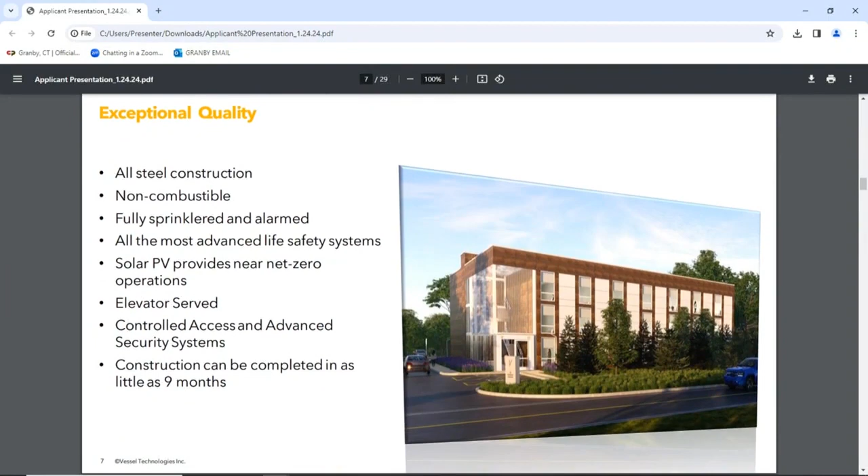We have a huge goal of creating very sustainable products. Everything we do is about energy efficiency and sustainability. So we have active systems that provide water leak detection to prevent leaks in buildings. We have solar photovoltaic, as I said, on the roofs. We use low-flow fixtures. We have active energy consumption features so that people can save money in terms of the operation of their buildings. And many other things that lead to the most energy efficient and sustainable building possible.

And then everything is created through our smart home technology that provides a number of different things in terms of quality of life as well as accessibility features and performance features that allow people to have a number of different things that are typical in a unit.

So a little bit about the site today. You can see the site here. The site was previously approved in 2007 for the development of about a 45-foot tall office building. That office building never came to fruition. You have currently an unfinished foundation on site with all sorts of other problems associated with it. No current stormwater management, obviously, no landscaping or anything else like that.

This is a picture of the existing conditions. I'm going to take a brief pause here and bring up one of the leadership so that we can talk about the existing conditions as well as these plans.

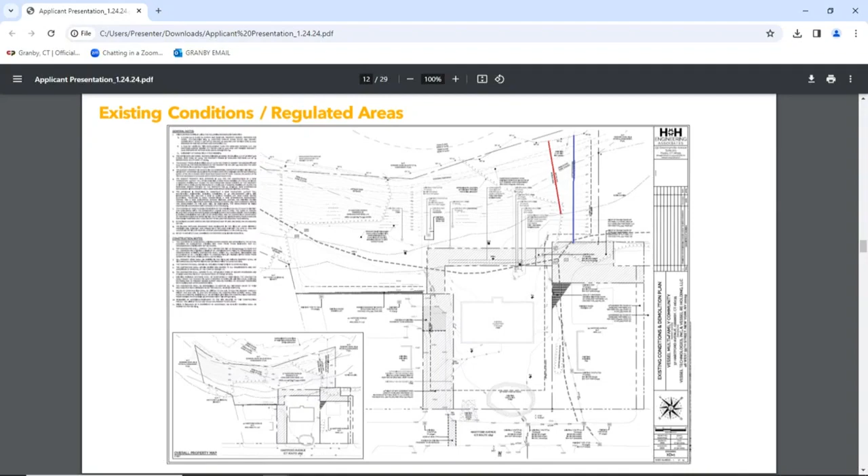So we'll go over a couple of these things. Good evening, everyone. My name is Seamus Moran, a professional engineer in Connecticut. And I'm screwing this up. We're out of it again. Is there a button up there we have to press to get it back into presentation? Can I handle all the tech for me? Sorry, one day. Let me start over again.

My name is Seamus Moran, PE in Connecticut, representing the applicant. I work for H&H Engineering Associates, and I'm the civil engineer for the project. Familiar with the site, I'm sure. It's a new application though, so you're going to hear the same stuff again, unfortunately, for the record.

So what you're looking at here is an existing conditions plan. This is what we have out there, and I'll take a step back in a moment. But this is, if you go to the site right now, this is what you see. There's a partially constructed foundation and some stormwater management improvements. You can see from the surface, catch basins, manholes, and a steep slope in the back of the property that was rough graded a few years ago.

The total property is about 2.55 acres. On the property, we have about 1.24 acres of land within the 100-foot upland review area, and an additional 0.41 acres between that 100-foot inland wetland setback and the 200-foot watercourse setback. While I'm mentioning numbers, what you'll see when I get to it is we're proposing 0.34 acres of improvement within the 100-foot review area, and an additional 0.29 acres of improvement between the 200-foot and the 100-foot.

So if you can skip ahead, this is an overview of the proposed site plan.

Generally, the building that you were proposing will be in a very similar location as the foundation that's out there now. If you go out there now, you'll see where the new building will be is in a very similar footprint to the existing foundation. In the parking, we are trying to reutilize a previous approval for parking spaces to the back of the building, which is essentially where we're laying our parking out, right behind our building.

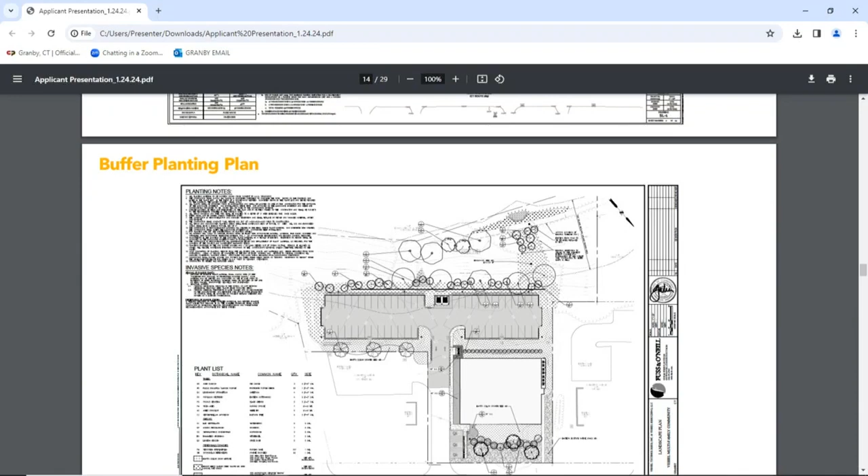Next slide, please. Greg will get into the planting plan, but as you can see, we're buffering our improvements with some landscaping. There's a much nicer color rendering that Greg will get into later, or maybe after I present. We'll come back to it, just so we don't jump around.

So as I mentioned, what you see on the first slide is two steps back. Prior to 2007, it was a single-family residence with a paved driveway. Then in 2007, it was approved locally for an office building, a 45-foot tall office building with 53 paved parking spaces, which again, this is as you see it now, partially constructed. The foundation is out there.

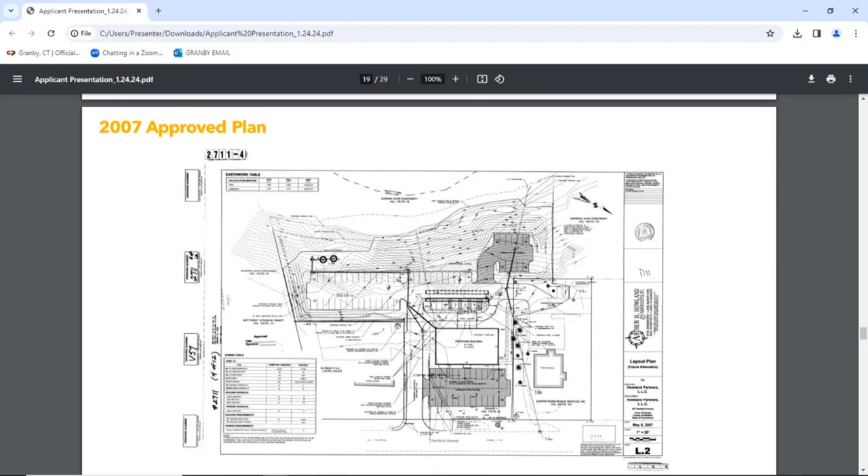Next slide, please. This, as I alluded to, is the existing conditions plan, that's the existing foundation. There's no building there, it's just the foundation, but they installed some improvements. They installed some of the stormwater management system, I think all of it in fact. They installed the septic system, utilities, and they rough graded the back of the site where the parking would be.

They never put any pavement in there. It was just simply a base coat and rough graded. But that area that you see where the parking will be is already rough graded. It's already flat for our parking area.

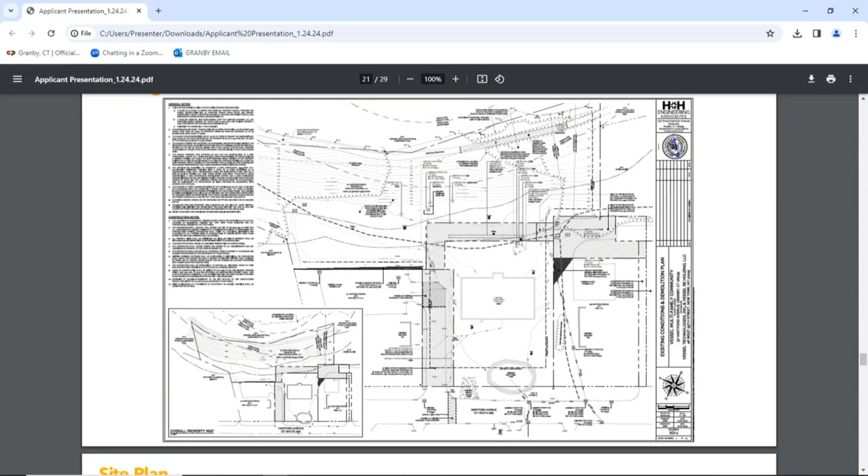Next slide, please. What you see here is our proposed layout that I just mentioned, 56 parking spaces. By Public Act 21-29, 44 are required. By Town of Granby regulations, 64 are required, and we are at 56 parking spaces.

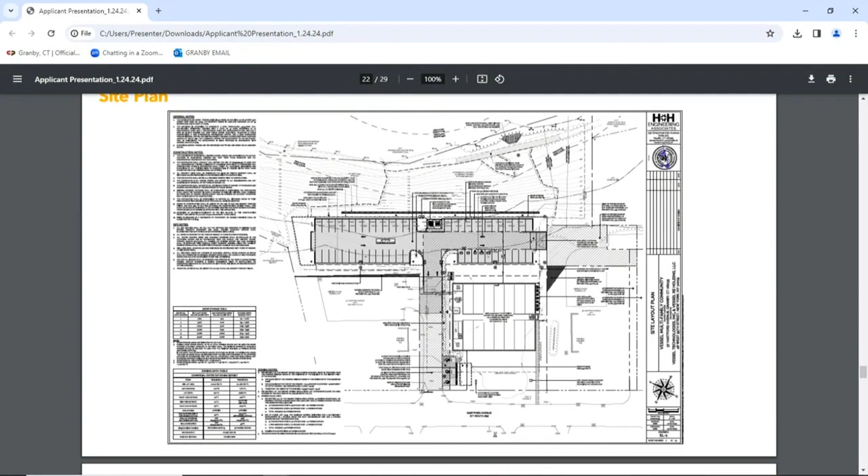Also, if you go to the next slide, what we're proposing is a 3-story building, 42 units. So a slight variation from previously, however, it's a new application. So what we're looking at is 3 stories, 42 units. 40 of those are 1-bedrooms, and 2 of those are 2-bedroom units.

There's a dumpster on the site. There's walkways internal to the site to get to the front door. Some storage areas, and 3 accessible parking spaces in the front, closest to the front door.

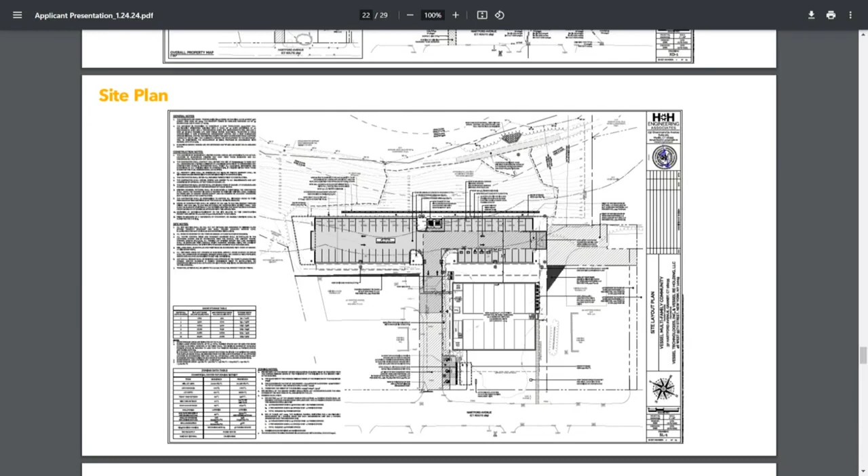It also infiltrates for the 25-year storm event entirely, so we won't have any discharge up through the 25-year storm event. Any discharge for the 50 and the 100-year is actually conservative because our infiltration rates on the site were well over 100 inches per hour, and we used a design rate of 20 inches per hour. So our discharge at the 50 and the 100-year are relatively minor as it stands, 1.61 CFS and 2.74 CFS from our stormwater management system, and that is conservative in those values.

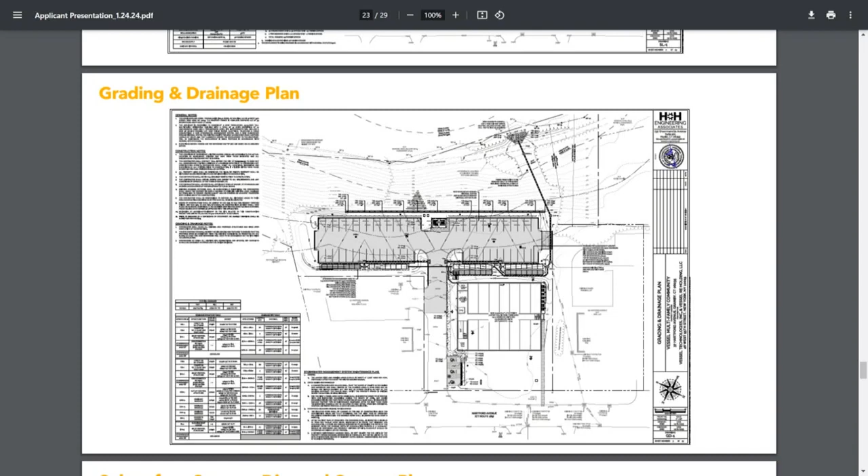Next slide, please. What you see here is the stormwater management system. We have one long linear row along the back side of the parking lot.

The public health code and the DEP code are somewhat at odds in how stormwater and septic effluent are managed together, so we found a happy medium. We heard the concerns of the commission last time. We are using a DEP practice of using stormwater runoff to dilute septic effluent, which the health code would much rather you keep completely separate. But we are meeting the separating distances required by the health code to allow infiltration of stormwater above the septic system.

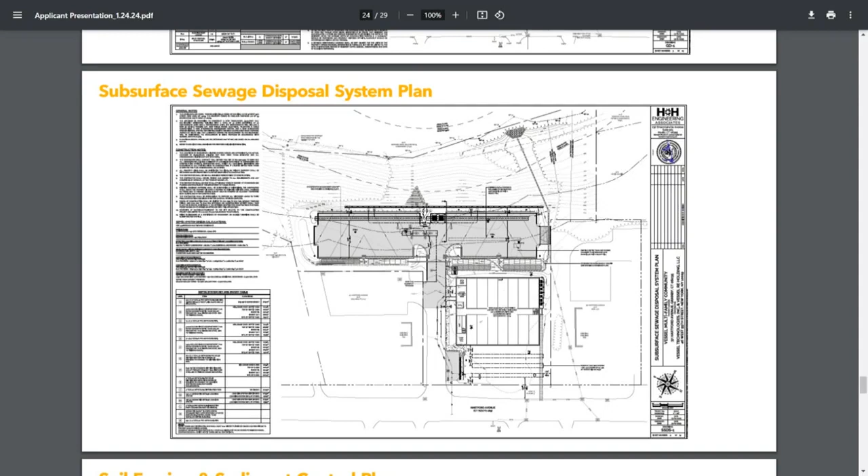The reason being, as everybody remembers, the nitrogen dilution analysis was a sticking point last time we were here. It's a DEP item, not anything we are required to manage. However, we heard the concerns and redesigned everything, the stormwater system and septic system, and now our nitrogen concentrations at the wetland limit are below the public water drinking threshold.

That slope, which Greg will get into in a moment, we are looking to revegetate. There is some vegetation out there now. It is steep, but one of the concerns last time was that we weren't landscaping the slope, so Greg will get into the landscaping we're proposing on the slope. And with that, I will pass it off to Greg.

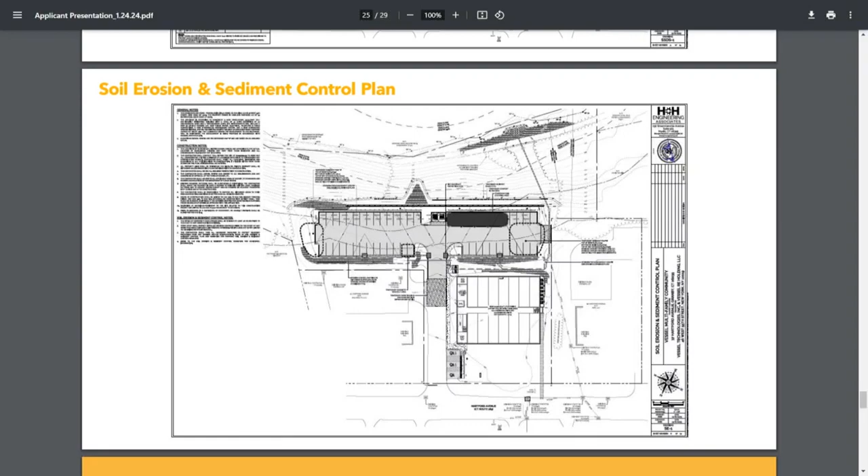Next slide, please. Thank you. Hi, my name is Greg Wilson, landscape architect with Fuss & O'Neill in Manchester, Connecticut.

The proposed plantings in the regulated area were largely arrived at in coordination with the previous wetland agent, Kate, through her review and in response to some comments. What we arrived at was a planting buffer at the top of the slope between the parking lot and where the top of the slope begins, and then additional plantings at the bottom of the slope adjacent to the wetland area.

The purpose of those plantings was to provide canopy adjacent to the wetland area, which would reduce solar exposure and prevent reestablishment of invasive growth on the existing hillside. The buffer at the top was highly visual in nature, and also a physical barrier to prevent anything from blowing from the parking lot down that slope into the wetland area.

The proposed plants selected are all native, flowering and/or fruiting, and of high value for wildlife species. They're also listed in the native plant list that's part of the Connecticut Stormwater Manual. Specifically the tree species, we wanted to make sure they were fast growing so they could get up to height and provide a big canopy, with the benefit of a more expansive root system to help stabilize the regraded areas at the top and bottom of the slope.

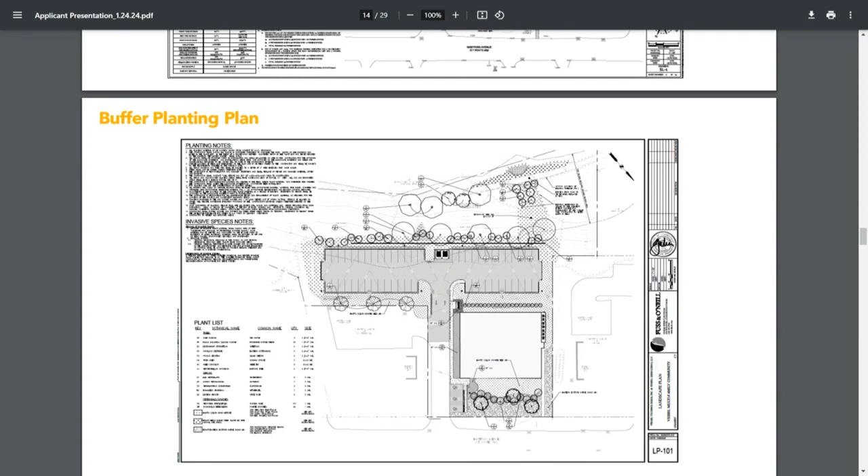Actually, Josh, you want to go to the coloring plan? It's easier to show. The regrading of the slope is predominantly from behind the parking lot to where our shrub and tree buffer ends, and then down the slope, which is for installation of a new stormwater pipe. That'll be reseeded with a native steep slope mix containing 20% annual ryegrass, which germinates very quickly and stabilizes quickly after seeding. The rest of the mix is flowering perennials and grasses that'll provide a diverse, varying seasonal cover throughout the year.

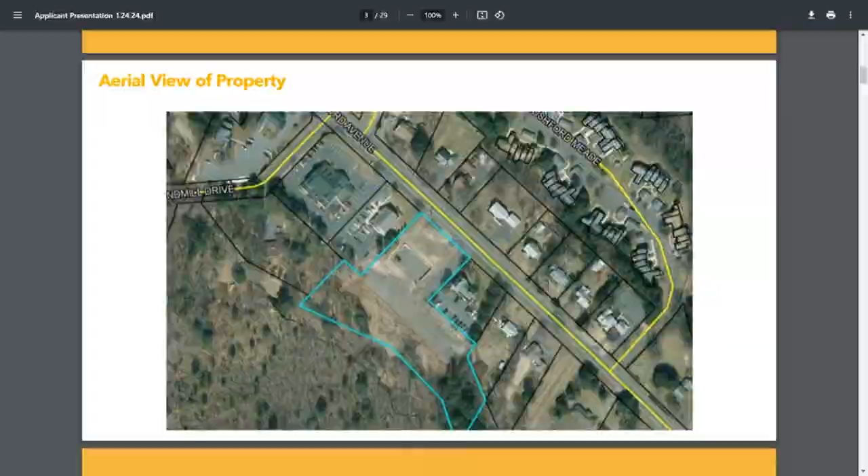This is an organic swamp. It's not his fault, it's just bad mapping, and he didn't go in and do what I did, what we did. So we took samples, we took them up to the UConn Soil Laboratory, which we like to use. They're extremely reasonable and very, very efficient. Most of what they do is for agricultural purposes, but we use them because they give us a whole bunch of information.

Among those things I had them do is look at the chemistry of the soil, which I won't bother you with now, but I will bother you with the last two pages of the report, an attachment. So what I did is I looked and said, okay, I want to get two samples. One I want to be representative of the deeper stuff, which has this muck that goes the depth of my auger plus. And I want to get a sample representative of an intermediate situation, which is probably closer to the wetland boundary, because obviously the more you go into the swamp, the deeper the muck gets, and the further you come out, the less so happens.

So I did two different samples, so we can kind of have one that's a little further away from the wetland boundary and closer to the stream, with organic matter. We basically went down, say, 24 inches or so, collected a sample, put it in a Ziploc bag, and off it went. The organic matter content, this is loss on ignition, so they basically burn it, and then they can figure out by measuring what's lost in ignition - 71.1% organic matter. That's pretty darn high. The second one, the other representative sample, only had 16.3%, still pretty high in organics, and that was a sandy loam.

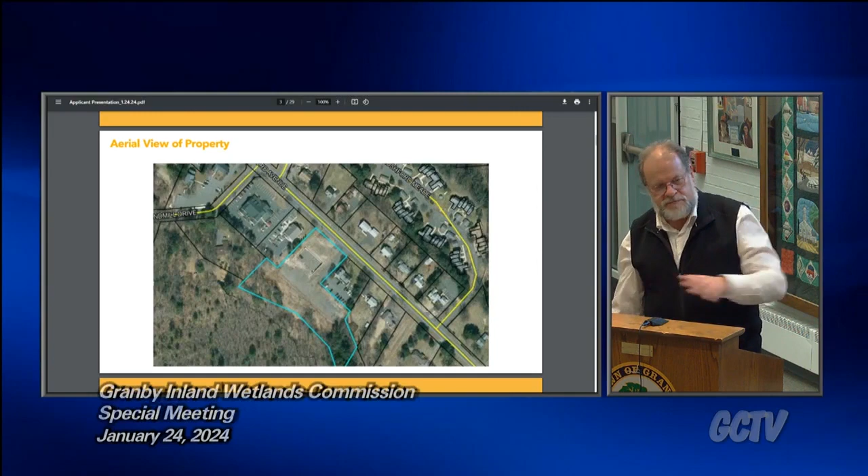And what's underneath this - Saco is a silt loam, which means it has fines in it. But what we found here underneath, at depth, whether it was say 28 inches or 42 plus, in the intermediate, was that we had a loamy sand, or loamy fine sand. So this is very transmissive. And why I'm saying that is because what's going to be coming down from the hill under the septic system is going to hit that layer, and the layer is going to be the groundwater. It's going to basically carry along, express itself down into the swamp, and it's going to be intermingling, if you will, with the organics also.

So, in his most recent report, Dr. Danzer, as you can see, I think he realized that what the applicant had done is heard the concerns from this commission and from the public, and went back and changed a few things. One of the things they did, which we could have gone into a little more detail but I'm sure we will in the future, is that the septic system has been enhanced.

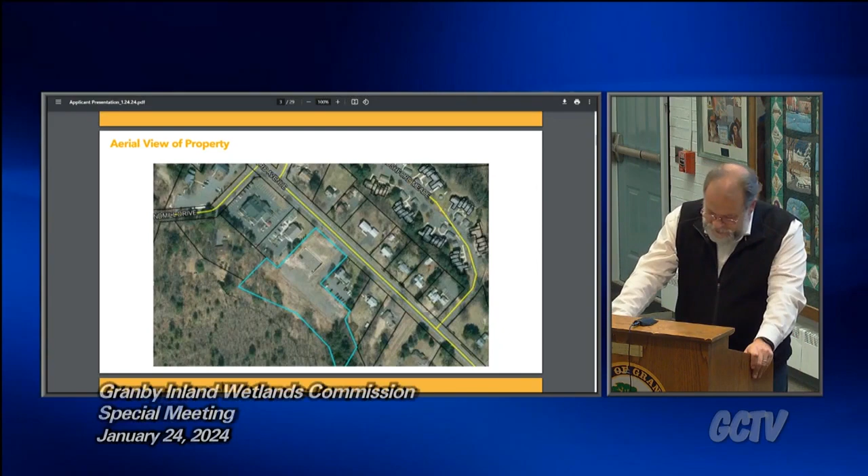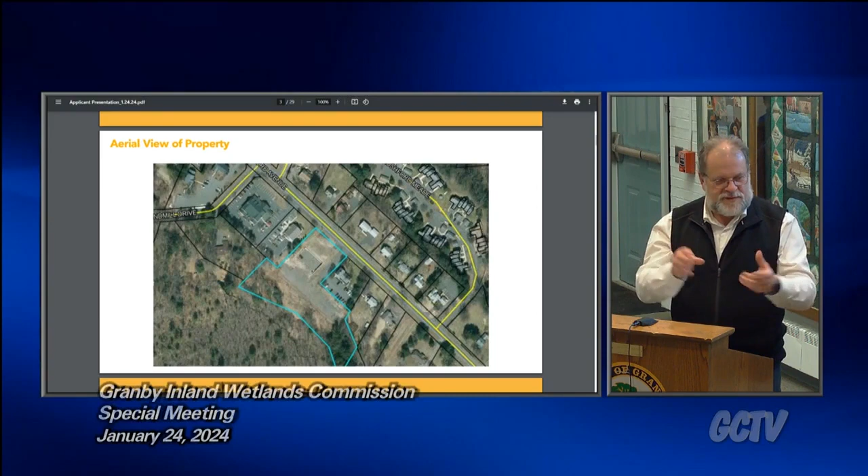They gave additional best management practices, including a system called Soil Air, which I've been familiar with from another project I did down in Guilford. I actually met the inventor, if you will, Mr. Potts. And what we found out is by using the soil air system, which aerates what's coming through, as I mentioned before, your best way of taking care of nitrogen is to have both aerobic and anaerobic conditions. Anaerobic is where there's saturation, not much oxygen, and aerobic is where there is oxygen, because there's two sets of bacteria, and if you get both working, your denitrification or nitrification is at a very high degree.

So we increased our attenuation of nitrogen - well, one of the ways we did it is by the soil air, and that itself gave us an additional 20% reduction of nitrogen. So that was significant.

So you'll see through this report that we have, in the first part - I'm not going to go into it too much at this point, I'm almost done with my remarks for the night - I just want to give you a flavor of what we've done. The first section is direct responses to your town consultant's report, point by point. There were 4 issues that he had, and we explained those.

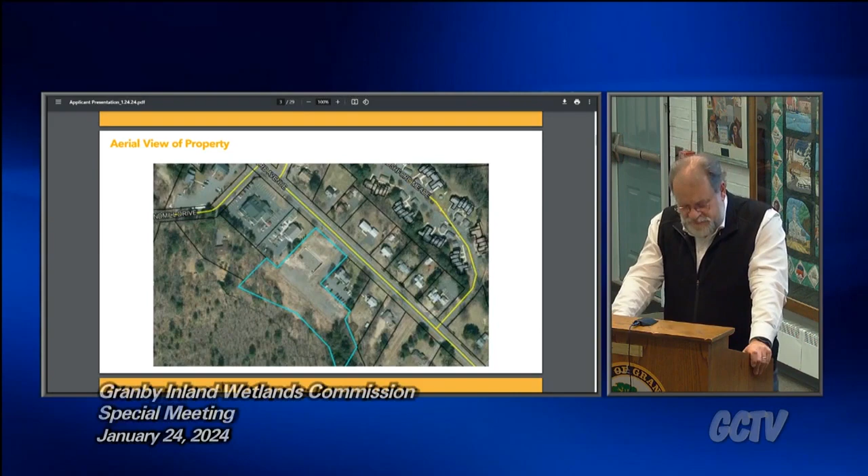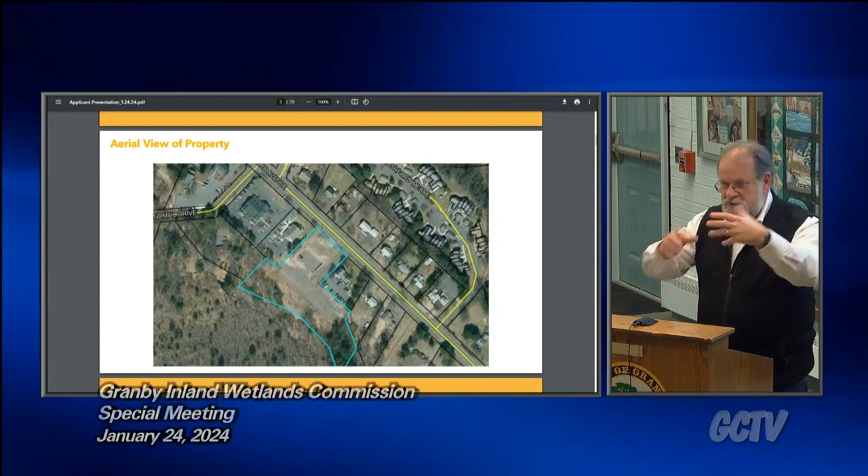The subsequent sections take a deeper dive into the science, more technical in nature. We looked at studies we already knew about from other projects of what swamps and these kinds of conditions do as far as denitrification, nutrient uptake, etcetera, and how these swamps are extremely protective of flowing waters, which is the more sensitive resource here, not the swamp itself.

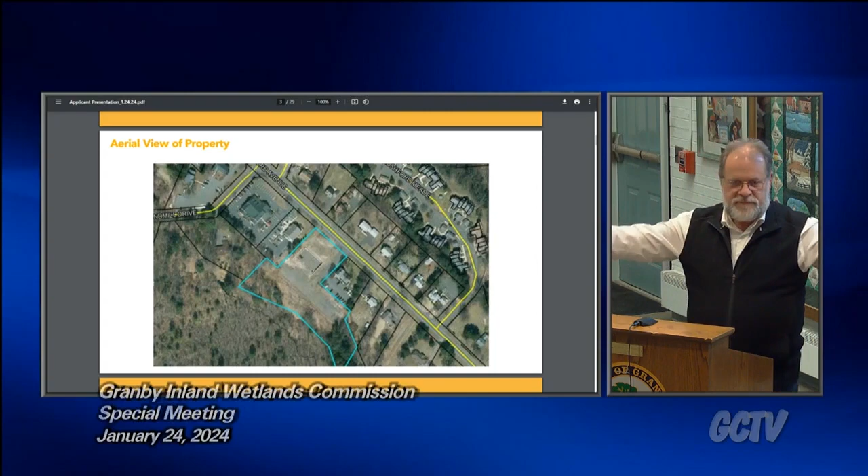Although if it was a swamp that was sensitive, what you'd call an oligotrophic system, one with low nutrient availability, dumping more nutrients even at a low concentration could have an effect on vegetation, fauna and flora. But this is a mesotrophic system, meaning in the middle - not eutrophic, loaded with nutrients, not oligotrophic, which is less nutrients - it's right in the middle.

One of the ways you can see that is not only from the tests we did on the soils, but also the vegetation growing there. If you see skunk cabbage and sensitive fern, typically you have a mesotrophic system - moderate availability or moderate fertility.

You'll see the deep dive we did, some of these meta studies, and we tried to answer all the questions Dr. Danzer had, not only in his more recent report, but also in the report he published before, which he references in this current report. So in essence, that's all I'm going to give you for the night.

And there's photographs and other figures. These are 3 of the papers.

My colleague tells me we're going to also give you - we have a large reference bibliography of the studies we looked at specifically. Here's some additional ones that we call seminal studies on these kinds of swamps and nitrate removal in streams and riparian areas.

There's 3 copies of each for the commission. They're actually not additional ones, they're just the most important ones.

You want to introduce yourself, and then we'll sit down? Okay, I'm Sigrun Gadwa, for the record. Qualifications very similar to him. I went to Brown instead of URI - shame on me.

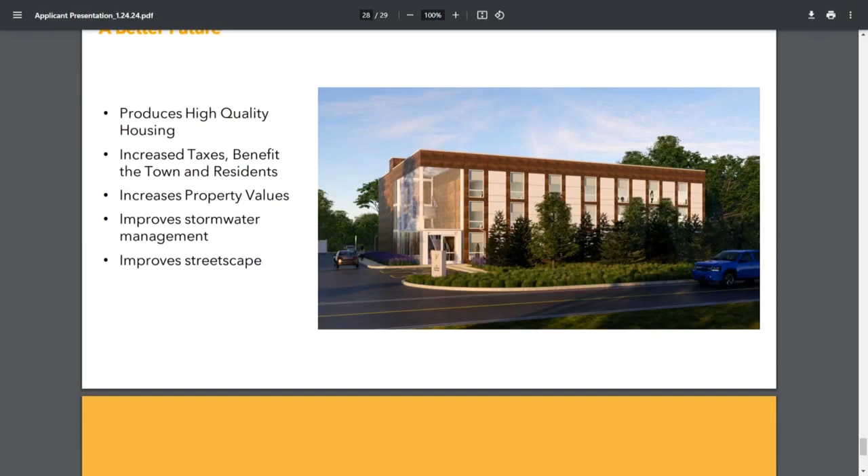So thank you for having us. I'm going to let my attorney, Tim Hollister, wrap up, but I appreciate it and happy to answer any questions.

Thank you, Tim Hollister. Just to wrap up, the goal tonight was to explain the revisions and try to explain that we think we have addressed the one remaining environmental issue from November, December, and that's all we have to present tonight, Mr. Chair, and thank you for your patience.

Thank you, Mr. Hollister. Does the commission, any of the commission members have any questions while we have the applicant and the professionals here? Obviously, we'll have another opportunity at the public hearing, but if this presentation raised any questions, now's the time. Hearing none. Thank you. Thank you.

Before we move to the next agenda item, I think we need a motion to put this to a public hearing. Is that correct? Yeah, if I may quickly, so Cameron Colville, the town wetland agent.

We appreciate all of the revisions that have gone through this plan thus far. You've obviously listened to the town and done a lot of changes to address some of the concerns. One such concern that I believe has been addressed but not necessarily solved is...

...the nitrogen loading that is possible from this project. While it's been greatly reduced, there is still nitrogen that would be exiting the septic system. And per Dr. Danzer's comments, the reduction to 7.3 milligrams per liter is a significant reduction. But then he does go on to say that it is recognized as a pollutant, and the proposed leaching from the subsurface sewage system qualifies as a significant impact according to the definition within the regulations.

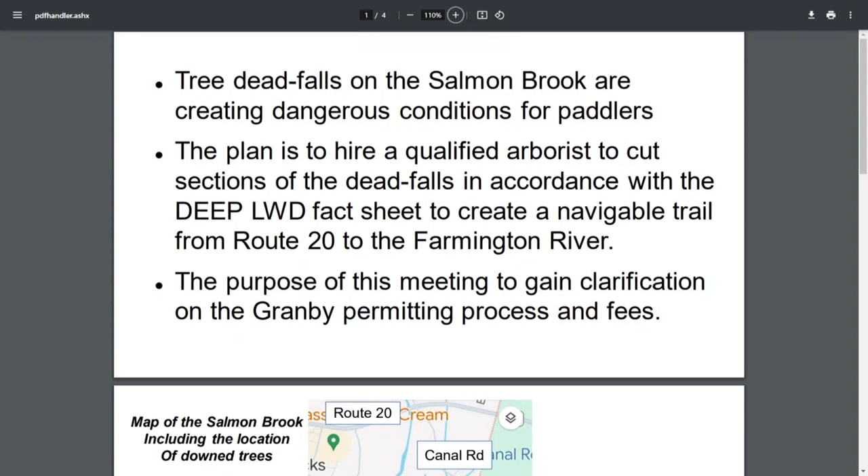In the past few years there's been some really big trees going down, with diameters of 2.5 feet to 4 or 5 feet. That's a lot more than just a little chainsaw can handle. So what I wanted to do was hire an arborist to cut some trees in accordance with the DEEP large woody debris fact sheet, and just cut a trail down the river from Route 20 to the Farmington River.

At this point there are 6 trees down in the town of Granby section of the Salmon Brook, so we're going to get a permit. This is a map. Route 20 is up there. This red line is the East Granby town line. The blue dots represent the big downed trees on the west branch or east branch of the Salmon Brook. Each one of those would have to be cut in accordance with the fact sheet.

I'm assuming you guys are really familiar with this. If you go to the next slide, this is the fact sheet. I assume you're probably more familiar with it than I am. But the next slide shows the navigation trail recommendation.

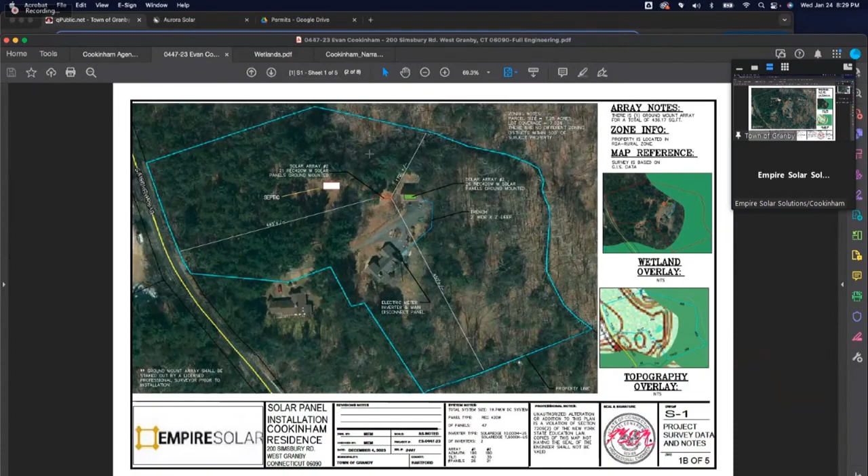As a starting point, just looking at your cover page, the photo on the top left - if the commissioners can see that, I think that's a decent photo to start with. That shows where the panels are to be placed. So on that you could draw in and point to which trees are to be removed, any soil that's going to be excavated, and where that would be piled up.

As far as erosion controls go, it's ultimately up to the applicant for a site like this. But given the area based on the imagery, it looks like silt fence would be a good one for that. You could always consult the 2023 Connecticut guidelines for erosion and sedimentation control, which will give you a few options and detailed instructions on how to install them.

So do we need a motion to accept the permit? Does it matter? I don't think there's a permit yet. Yeah, they did apply. They have a permit requested, so can we vote on it until next month? We just received it - I think we could vote on it to accept it, and then next month we decide on it, right?

The permit is incorrect. The permit reads 26 panels on the roof of the garage and 26 panels to be placed on the ground, but then the letters say 47 with 21 panels in the rear of the yard. Could the applicant clarify that? That must have been an error - 26 panels are proposed for the garage roof and 21 panels for the ground mount. So you'd have to correct that on your application so that it's clear.

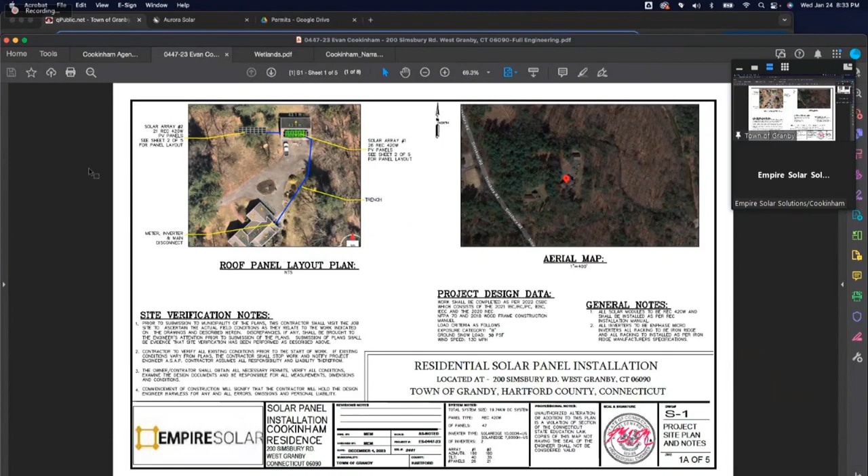I just want to point out, Cameron, that with our last wetlands official, there was a lot of frustration on the part of the commission when applications would come before us and we really couldn't locate things, we didn't see erosion control. I think we had asked our wetlands official to be a little bit of a gatekeeper and make sure that we had applications we could actually review when we accept the permit. So if we do that going forward, it'll probably streamline the process a little bit. All right, absolutely. Okay, so we'll keep this on the agenda and move it to the next meeting then.

And that's on February 14th, correct? Yes. Okay, thank you. When do you need to receive the revisions by? What's the deadline before the next meeting? At least a week prior, so we can get everything out. That's like the minimum.

Do you have any other questions for the commission, Empire Solar? Not at this time, but if anything comes up, who would be the best person to contact? Our staff, I think. Yeah, that would be me, Cameron Colville, and you can reach me at wetlandsagent@granby-ct.gov. Wetlands agent, I'm sorry, can you repeat that one more time? Yep, wetlandsagent@granby-ct.gov.